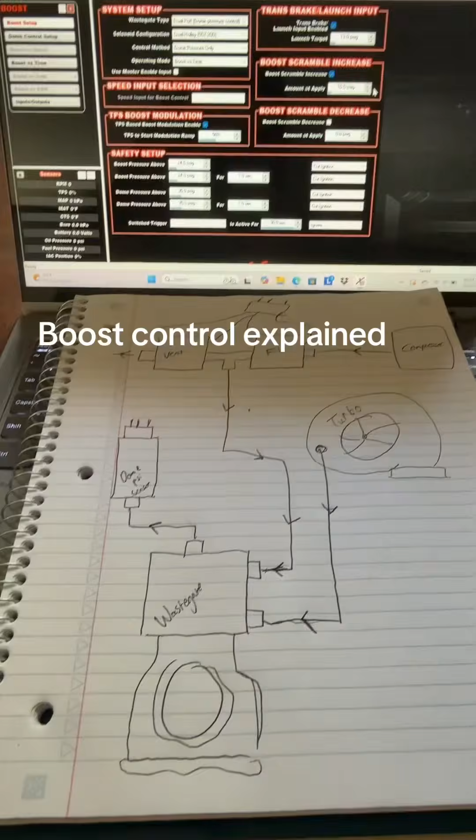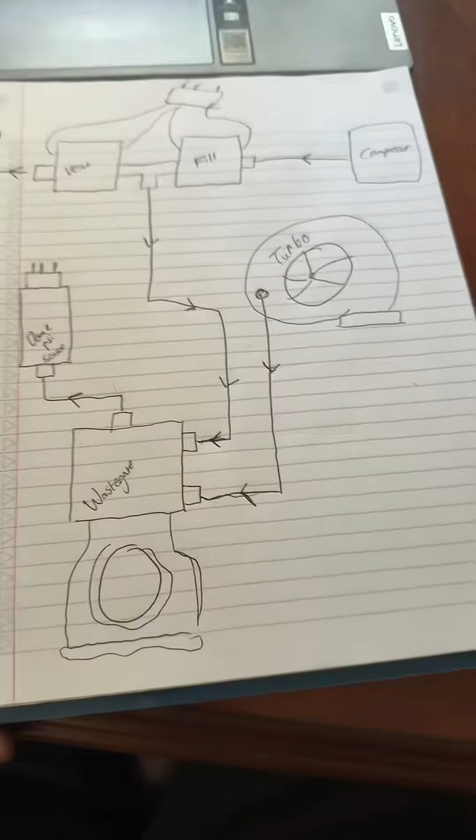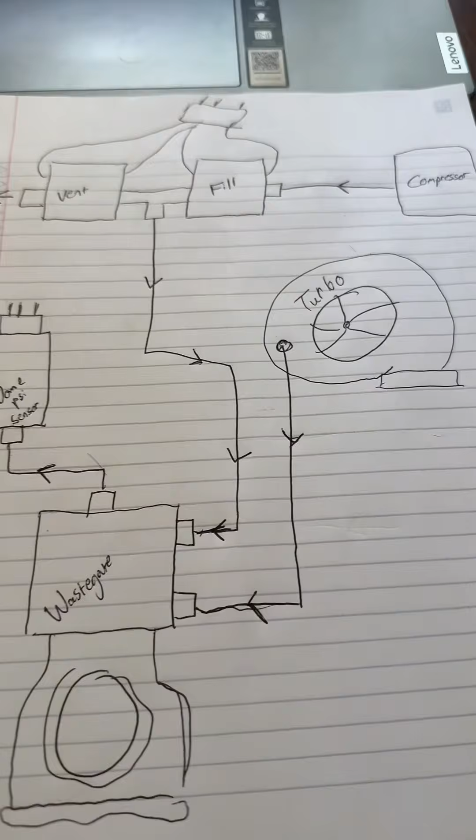So, here's an overview diagram of the system. These two Mac valves, an air compressor, and then you've got your turbo, your gate, and your dome sensor, obviously. So here we have the line diagram. Just follow the path and it kind of shows you the direction of the air in the system.

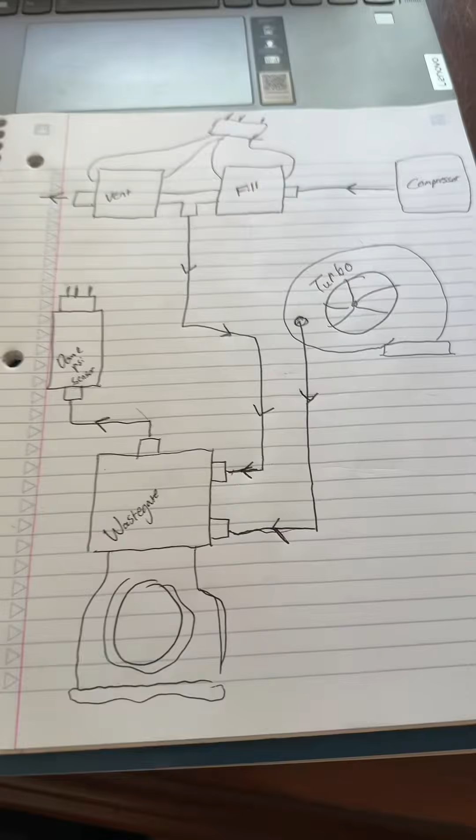We use a compressor. There's nothing wrong with using a CO2 bottle or nitrous or whatever source of compressed air you feel like using. We just use an onboard compressor for a variety of reasons. You can fill tires off of it and it self-refills. It's got a pressure switch on it, and that's all it takes.

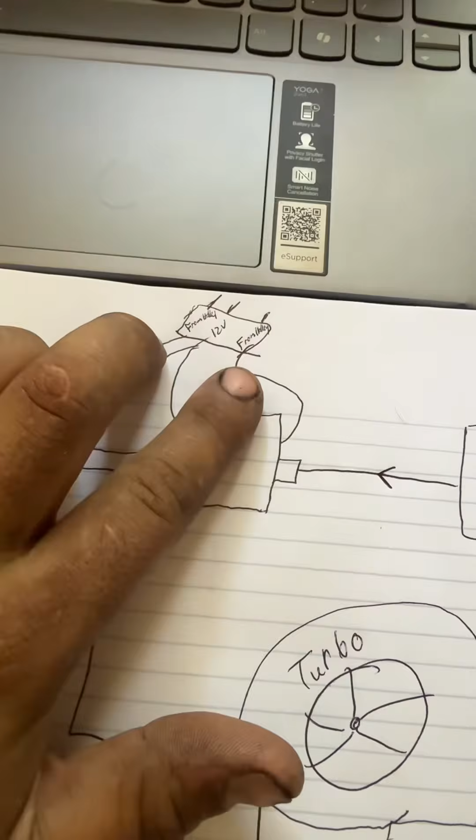As far as basics of the wiring, you're going to have your dome pressure sensor and your fill and vent solenoids. Those are just standard Mac valves. You're going to have them run on 12 volt, and you're going to have two leads coming from your Holley I/O. One of them will control the fill, one of them will control the vent. And then on your dome pressure, it's just a standard 3-pin. So you're going to have one wire that goes back to your Holley input, one's 5 volt and one's sensor ground.

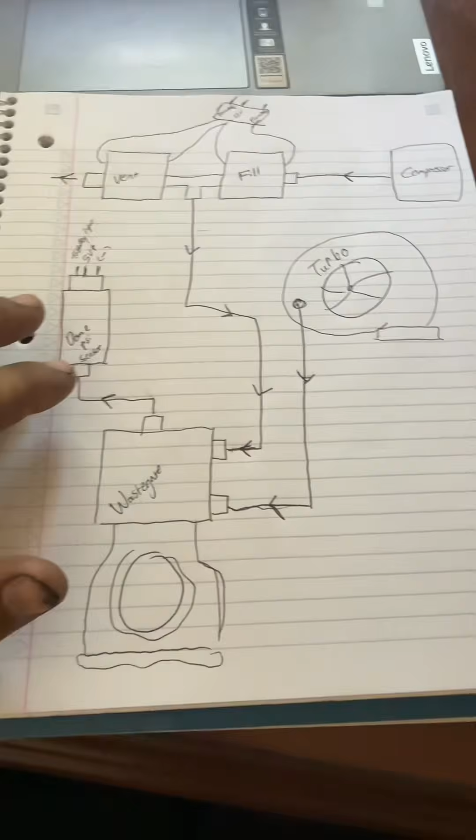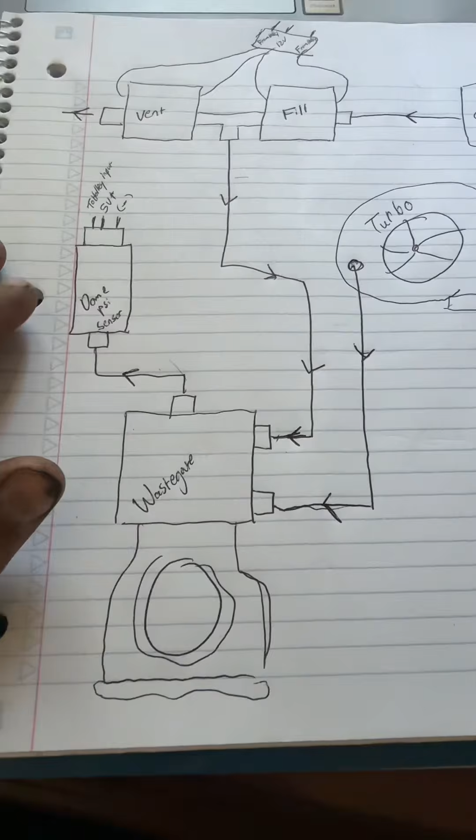Personally, fluid or non-fluid filled dome pressure sensor, I always like to keep them remote mounted, as I feel that it keeps vibrations to a minimum on them. Some people will mount them directly into the top of the gate. That's just not how I like to do it. I'll put them on an isolator mount of some sort, usually tucked into the fender and out of the way of any heat or source of damage, anything that could hit it.

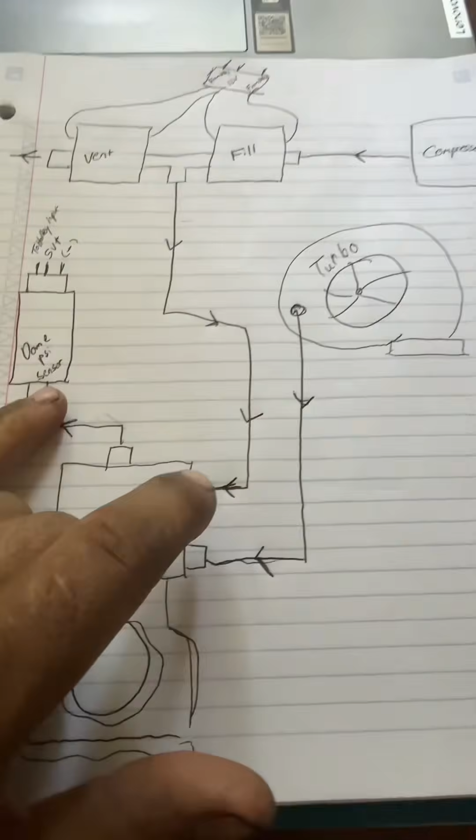But your dual Mac valves are going to be teed in the middle, and that's going to go to the top of your gate. This will also go to the top of your gate. Some gates don't have this top provision, and in that case, if you don't have multiple top end ports, it'll tee into the system here. And then you're going to have your turbo run to the bottom of the gate.

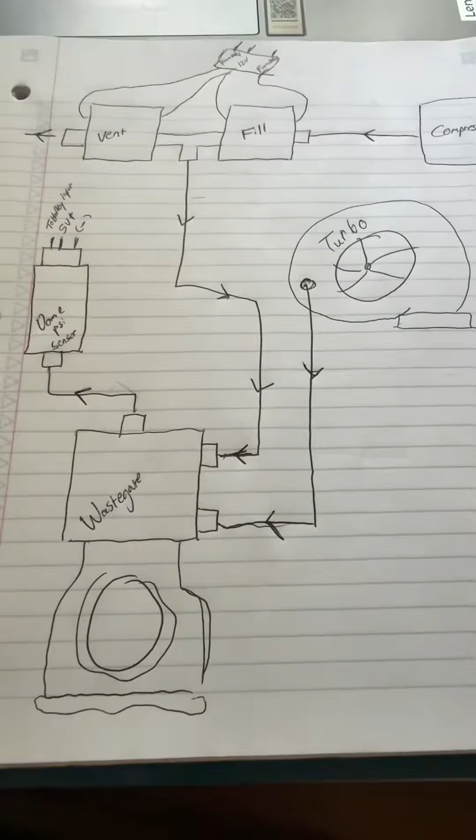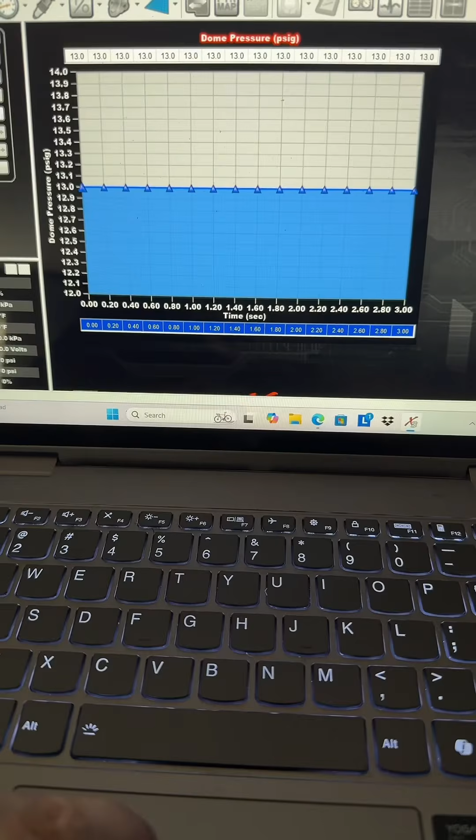Here's a basic of what it looks like programmed into the Holley. But the cool thing is, you can go over to this boost versus time, and this is what your dome pressure is. So this is the amount of pressurized air it'll apply to the top of the wastegate to equal out the boost. And when the boost and the dome pressure are equivalent, it'll go ahead and tell it to open up and bleed it off.

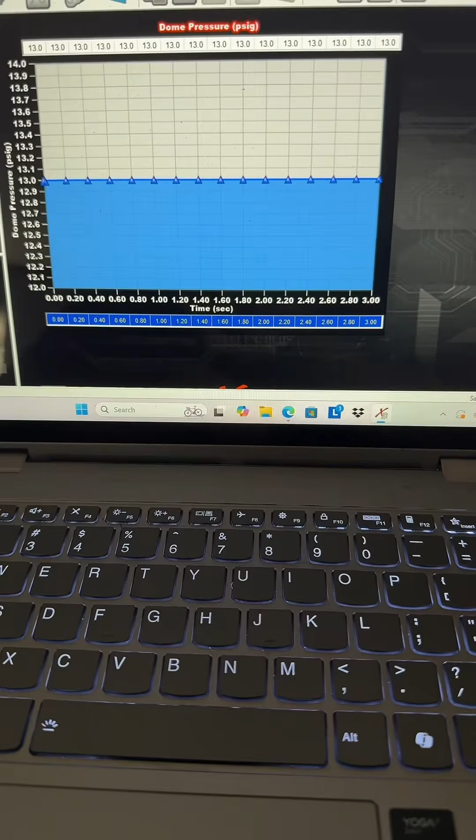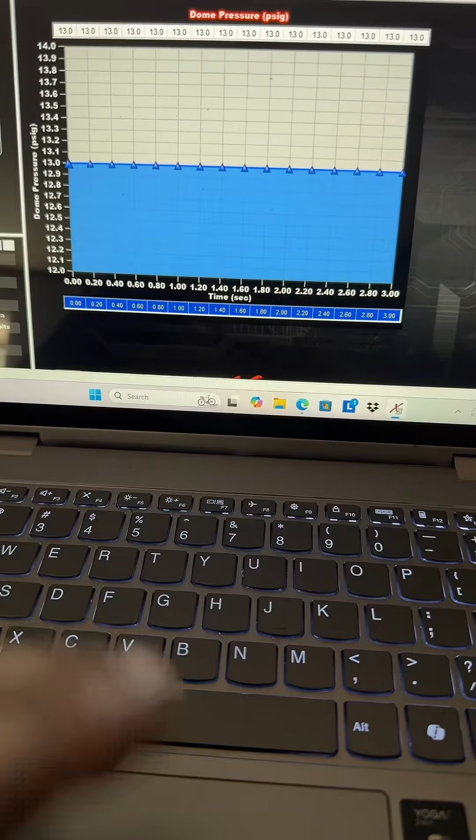Obviously, all this is relative, as this is dome pressure, so that's stacked on top of your wastegate spring. So if you have a 2 psi spring, in my case, I run 13 psi of dome here, that would equal out to approximately 15 pounds of boost is where your wastegates will open. But it makes the turbo spool faster, it holds it shut until you make the boost, and it makes it a lot more consistent down track. Overall,